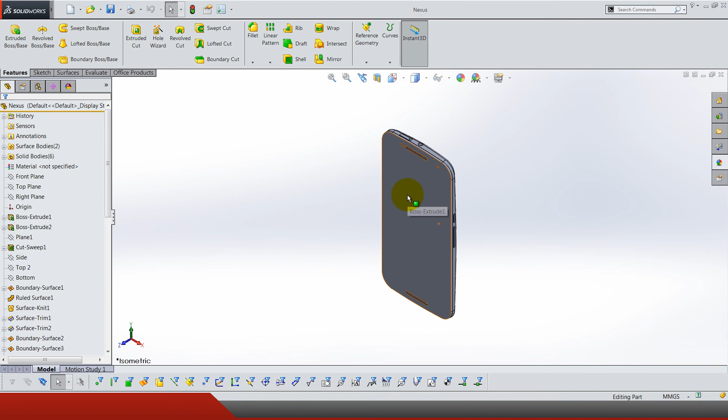These two surfaces we need an offset of 0.1, and make sure it goes inside.

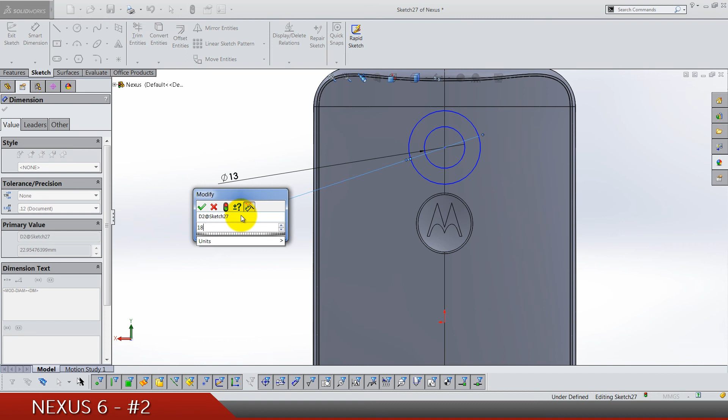Now front plane sketch, just a second, okay, and do 2 circles, 1 and 2. Now it's vertical with the origin. The diameter for the small one is 13. For the bigger circle it's 18.75. Now from the origin it goes 56.

Exit the sketch and let's do extruded cut, but this is gonna be thin feature 0.1. Let's view it from the back. And the direction of the thickening is gonna be inside. And yeah, I think that's it. Just press here through all.

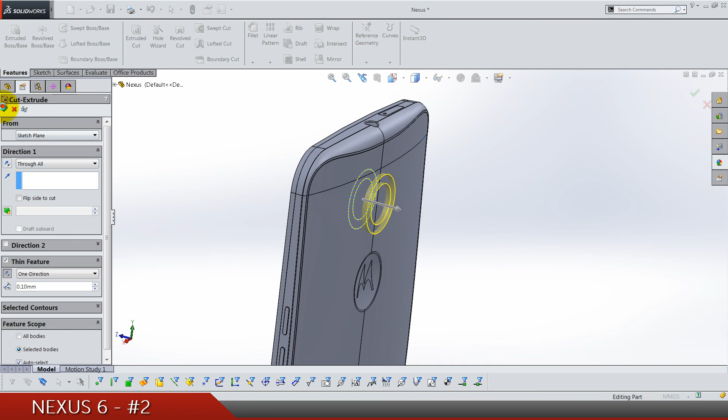Now same sketch, and extruded cut, but in selected contours deselect and select the bigger circle from the top. Let's view. We need an offset by 3.75. This direction is more to the back, not to the front. And again, no, we need here 0.1.

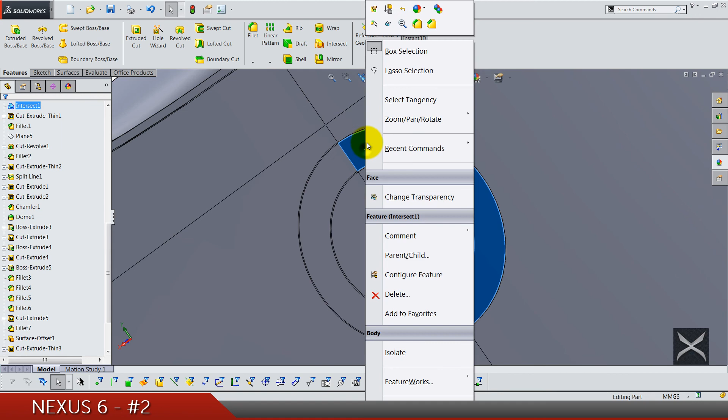Okay, now if you are having these bodies to keep question, that means that you have done everything right. Also, if you can hide this body, it also means that everything is okay, and hide this surface for a moment. This is how it should look.

Now what we need is... no, let's first do back surface offset by 0.75 to the inside. Sorry, and front plane sketch from the back, and do one circle and another one here. Let's find the sketch we used here.

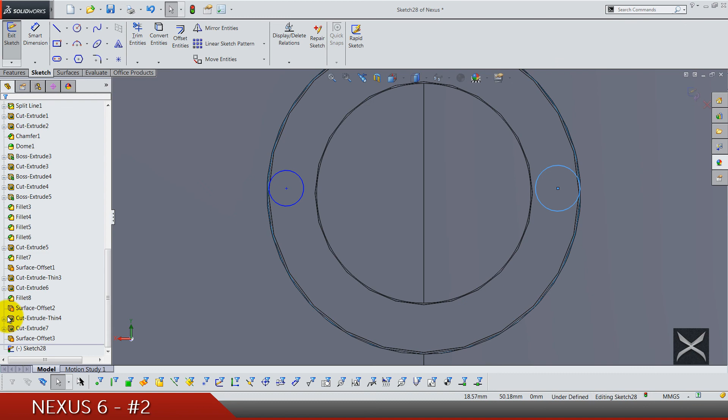It's sketch number 27. Make this point, this one and this one horizontal. Now from the point to the circle we have 7.8, and same here. The diameter is 1.75 also for this one.

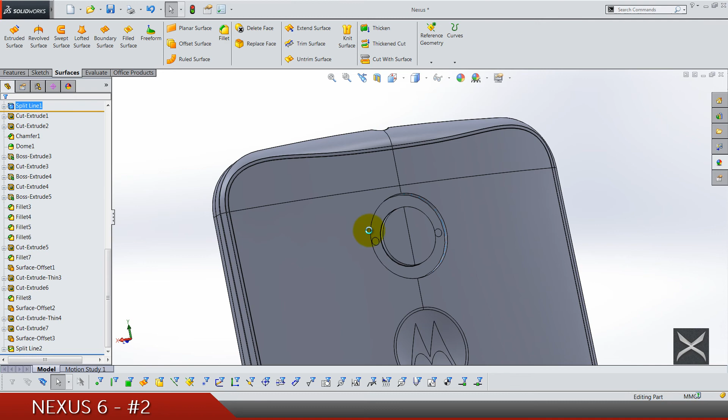Exit and let's do a split line for this face, and it looks weird. I think that this is right. Yeah, I'm gonna hide this sketch now, and we can now do 2 domes. So the input for this face is 1 millimeter, and again for this face 1 millimeter.

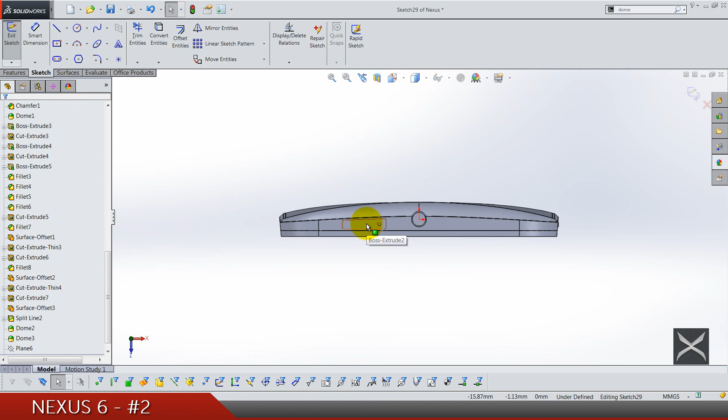Now plane by top plane, 56, direction is top. Sketch and we can hide it. Now let me just check what we need to do here.

Now let's select this dome and do an intersection curve, and another curve we might need or not. Let's try like this.

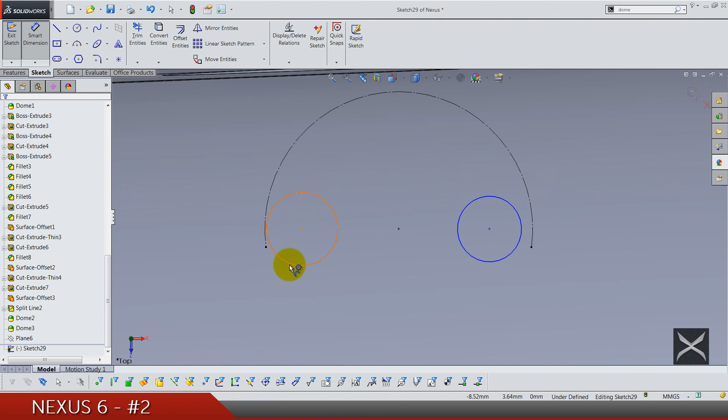For construction, now draw two circles, one here and one here. Make these points horizontal. Dimension between the point and the circle is 0.3. Same here. Diameter is 0.3.

And we also need one center line that goes from the origin up. Make sure it's vertical. And we can do revolve. Now this is just gonna be a revolve, and do not merge results.

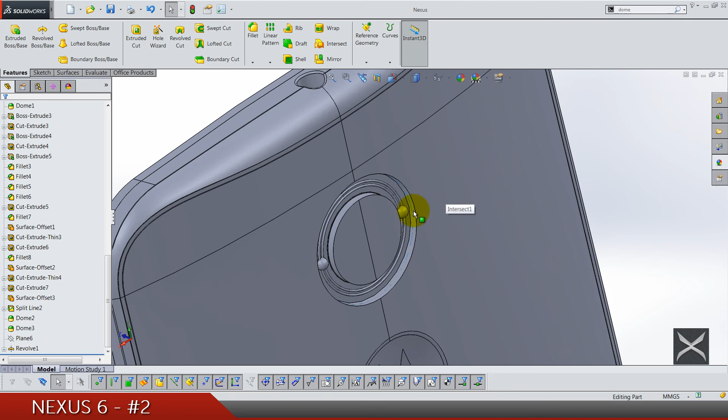Now let's do a front plane sketch. Spin it around to the back view and do a circle that's gonna be diameter 5.25. Find the sketch, this one, and this point is gonna be coincident with this one.

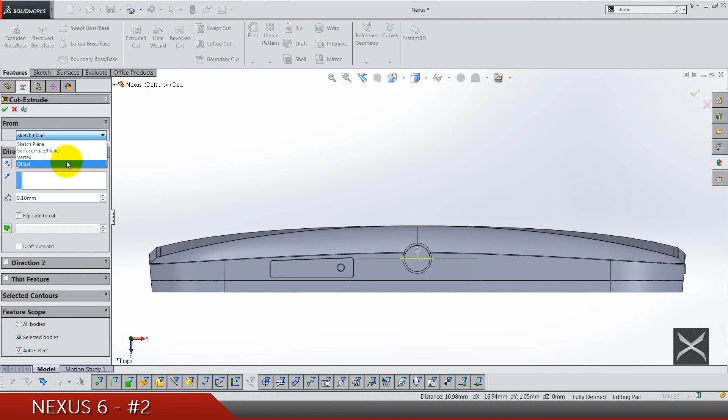From the top view, do extruded cut, offset by 3 to this side and cut through all. Now we need a chamfer for this edge. It's gonna be 0.25. Okay, perfect, and let's hide this sketch.

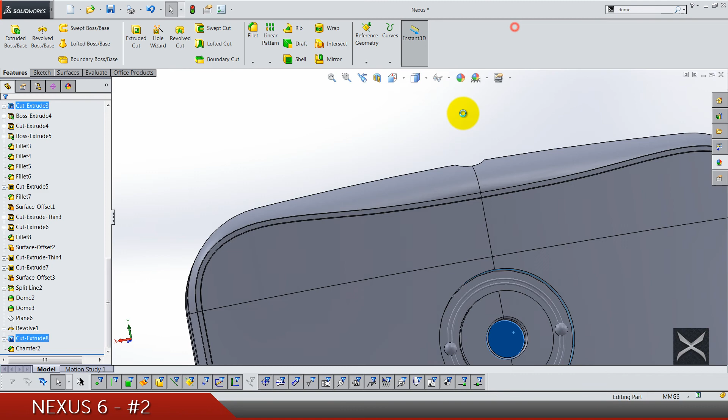Let's see what's next. So on this face we also need a sketch. Let's convert and make it for construction, because we need these points, and this circle is gonna be phi 3.

Now cut again a 1.5, and chamfer 0.1, and again we need a dome for this camera. The input is 2 millimeters. Okay.

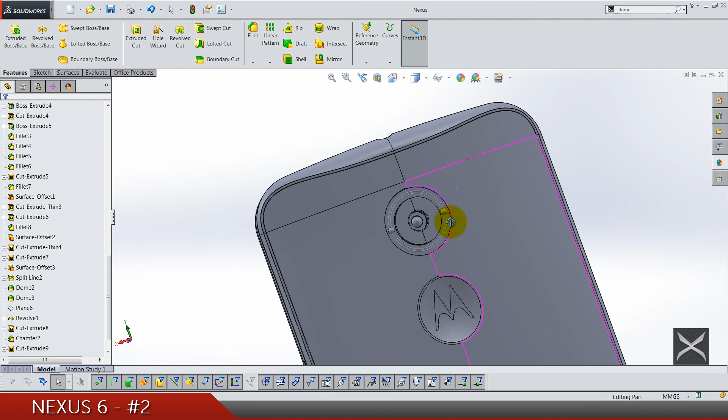Now let's do one front plane sketch. Again it's gonna be, let's find the sketch we already used. Okay, it's this one, show, and let's, well, we don't need a sketch, sorry. Let's exit and use this existing sketch. Now select extruded boss, this is the direction, and select the contour, select only the small circle.

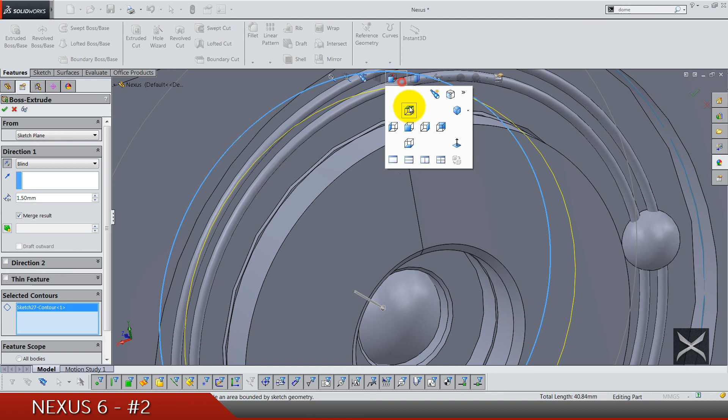Now the distance is going to be, let's see from the top, 3, 4, 4.5. Let's see with a 4.5. With a 4.5 we still have this gap here, and that's not good. Let's make it bigger.

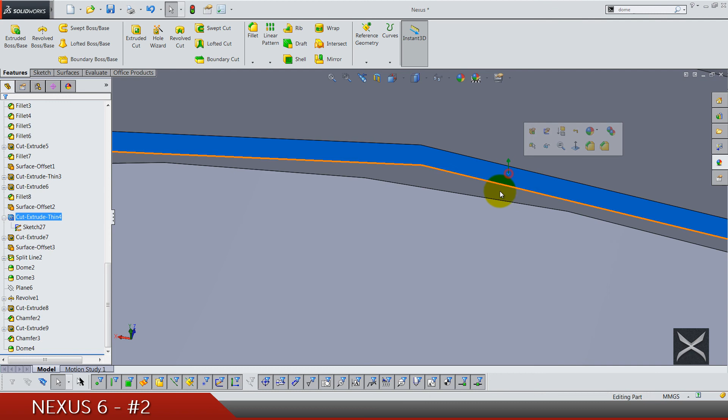So looks like we're gonna delete this, I'm sorry. And we're having something here that is freaking me out. It's not so visible, but it's visible.

Aha, so we should cut it actually. Okay, let's do a front plane sketch. I'm sorry for this, it's not really easy sometimes to get all details. I'm gonna convert this edge and also this one, these two. Now I'm not even sure what we're actually having.

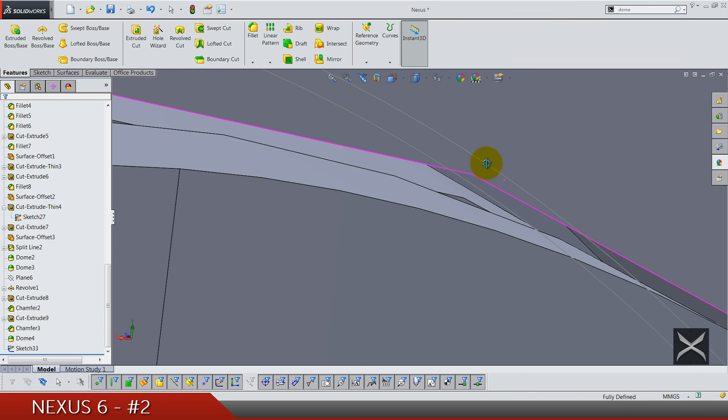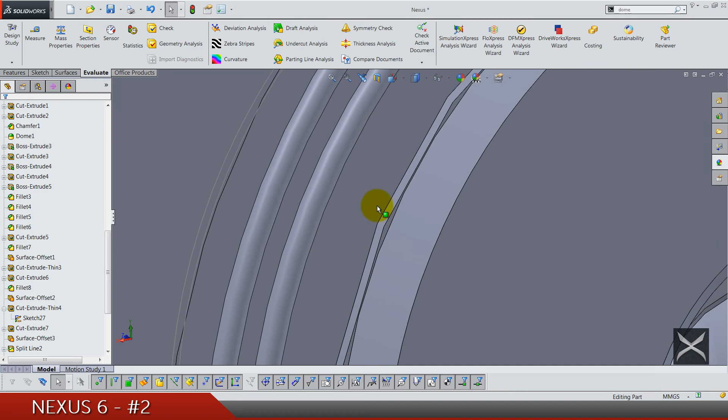So it should be, let's measure from the front plane to here, 3.75, and from here to the front plane we have 3.75. How's that possible? Okay, let's try then this sketch. Extrudes by 3.75 this direction.

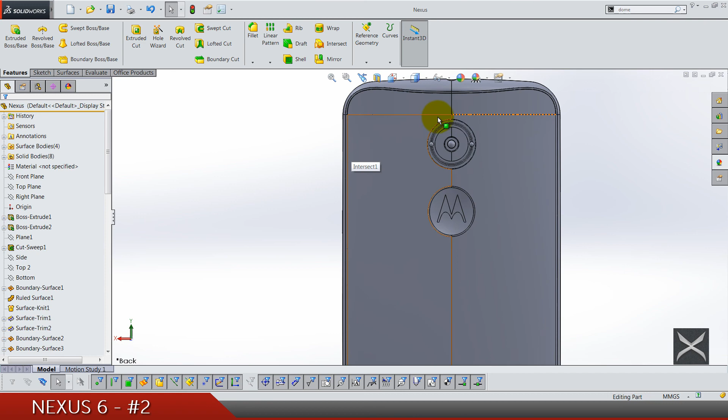Okay, this was so that's fine now. We can hide this sketch and also the front plane. I don't know where I turned it on. And what's next? The sketch on the plane, and the plane is number 6.

So this is what I wanted to connect. Let's make a sketch on this face. Do a convert and another circle that goes till this one. And extrudes.

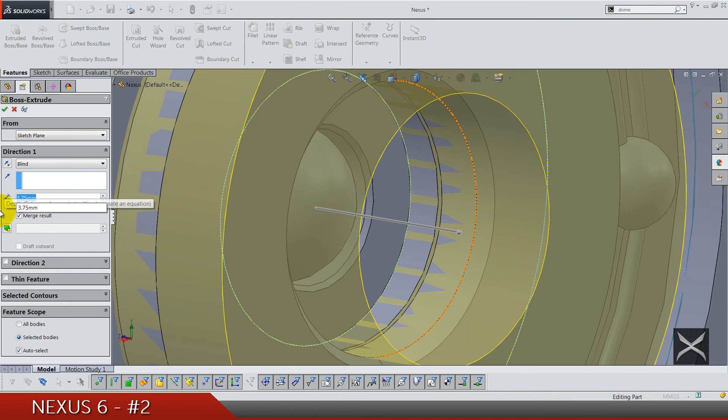Let's just make it 2. Is it too much? Yeah, it is. Let's try 1.5. Yeah, that's better. Now we're not having any gaps, and everything seems fine now.

Sorry for this. Let's get back to plane 6 sketch. Now this face and this one will do an intersection curve.

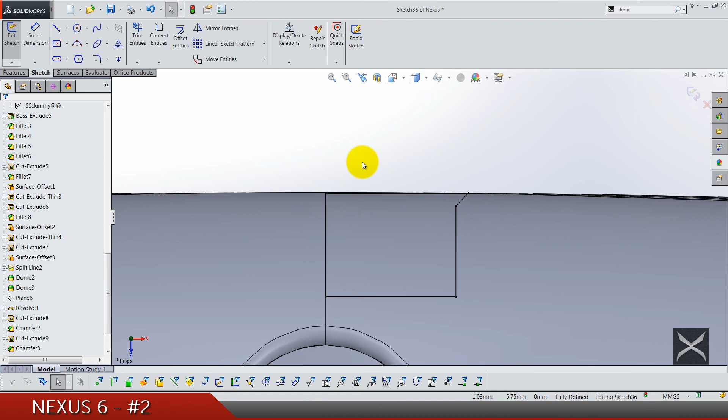Get back to the top, delete left side, and let's just close this loop with a horizontal, vertical, and make this line also horizontal. That's it. And do a revolve. The axis is gonna be this one, of course. Do not merge result because this is just the glass of the camera.

Okay, what's next? Yeah, let's get back from the solid bodies. This body should be shown visible, and do a fillet 0.1

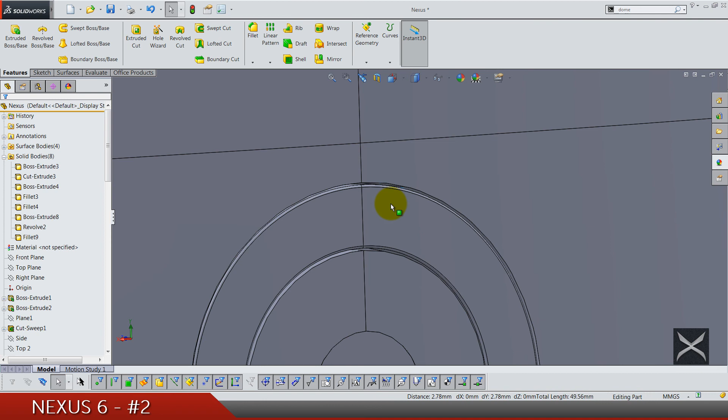on the edge of the glass. So it's this body, these two edges, and fillet again 0.1 for this edge and this one. It should be the same body, and it is.

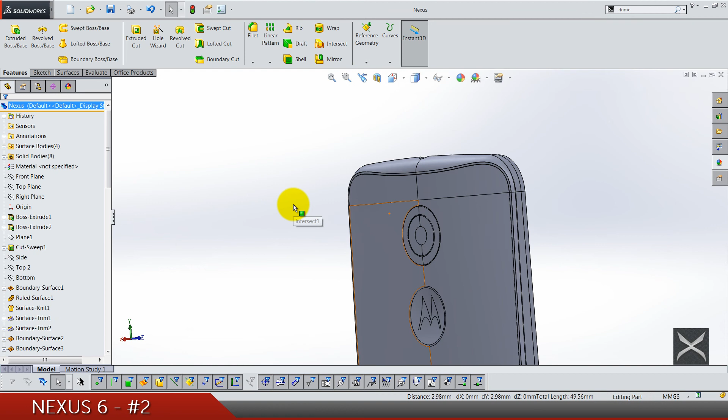Now we have to finish the charging details, the hole for the charge. Top plane sketch, and let's get it to a bottom view.

What I'm gonna draw is something like a rectangle. I don't know why I didn't use rectangle. Never mind. Do a center line from the origin to the midpoint of this line, make it vertical, and now this should be 7. This dimension is 2.25.

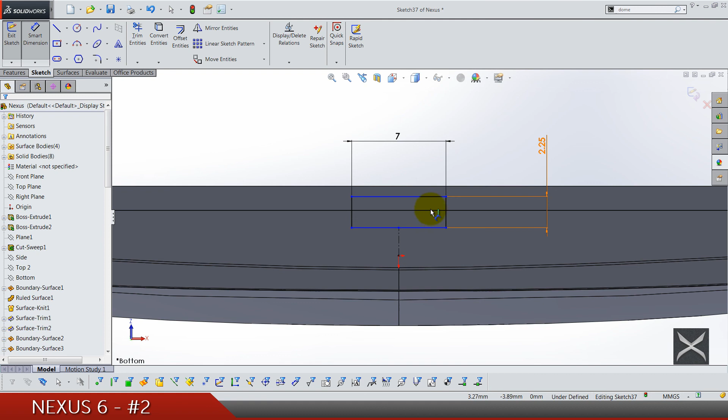Okay, now this point is actually at the origin, so we haven't needed the center line. Let's delete the center line and make this line and the origin midpoint.

And we need a chamfer. It's here. 0.75. The angle is 45. For these points, yes, and this one.

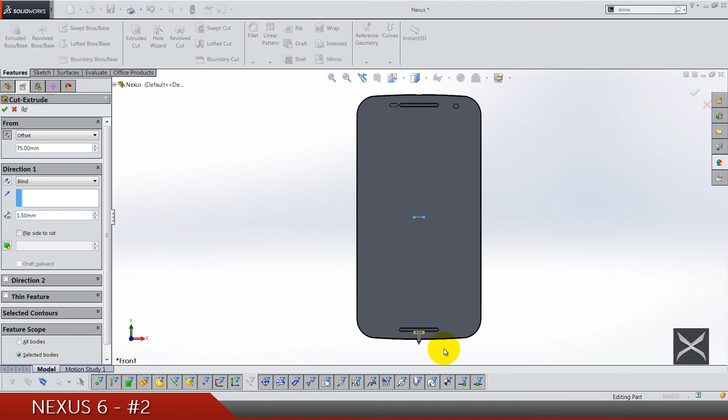Exit the sketch. Now front view. Extruded cut offset by 75, and direction is bottom, and we are cutting through all, of course.

Now let's use the same sketch. Extruded boss, again it's offset by 75, and we're gonna do the thin feature, so the thickness is gonna be 0.175. Make sure that it goes down, and it's gonna be 4.75 in this direction. Make sure also that we are not merging this, so it's gonna be a separated body again.

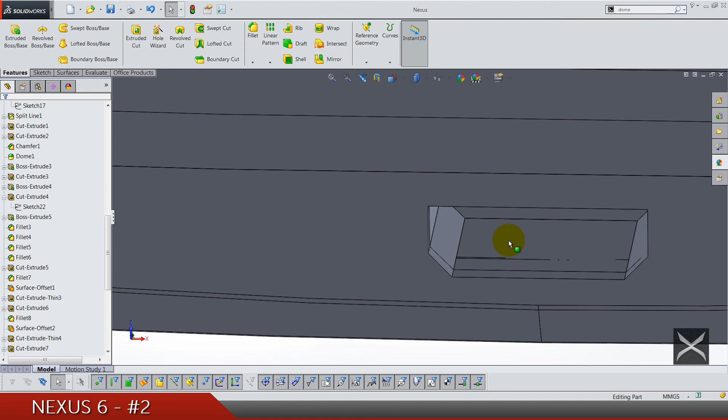Now we just need to edit this thin feature, because we wanted it to go inside this in a thickness. Okay.

I'm gonna hide this body just for a second, and let's make a fillet. Fillet is 0.15 only for these edges. Just select all of the edges like this.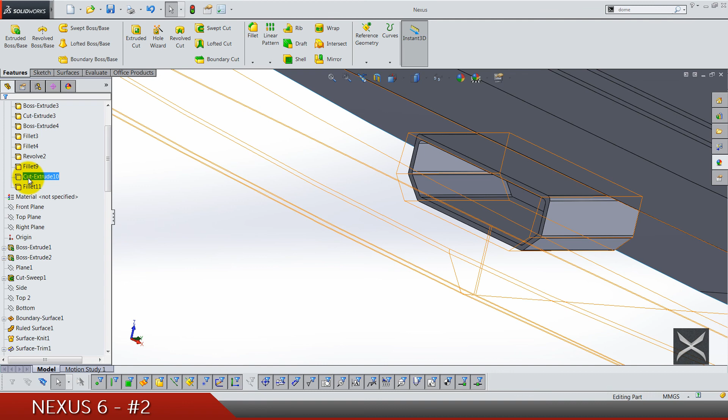And let's get this body visible. We also need a fillet 0.15 for its edges, for the edges of this hole. Looking like this.

And also fillet outside 0.05 for this edge. Or we can do 0.1. Let's do 0.1.

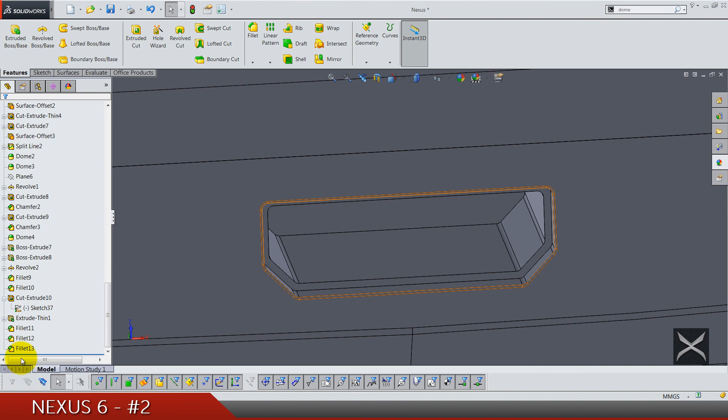0.1. Now let's use this face as a sketch face.

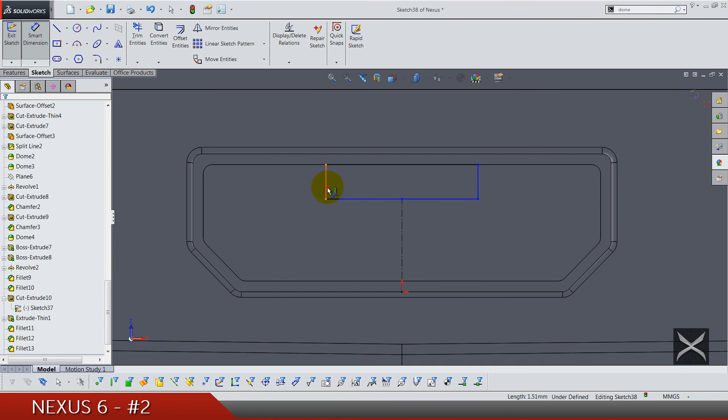And we need just one rectangle. I'm gonna use this one. The center line that goes from the origin to the midpoint is vertical. Height is 0.5 and this is 3. Exit the sketch.

And do extrude in this direction till, let's say, this point. And we can unmerge results.

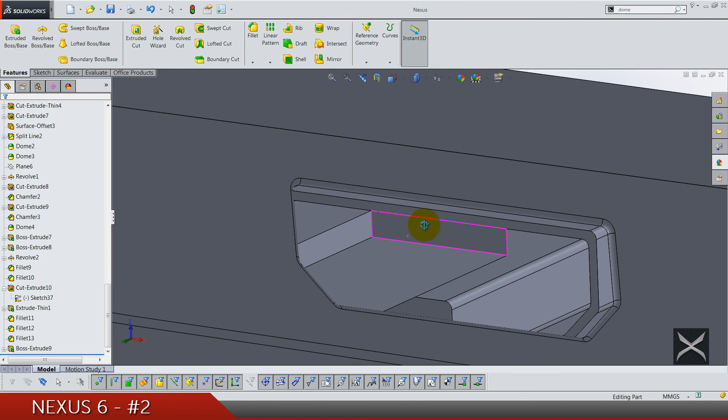So in rendering you can have this body separated, and also what we can do here is, let's just edit this boss and offset it by 0.5 to the inside.

Now on this face do a sketch. We need 3 rectangles, 1, 2 and 3. Center line from the origin to the midpoint of this one, of course vertical, and it's gonna be 0.25 by 0.25, and same here.

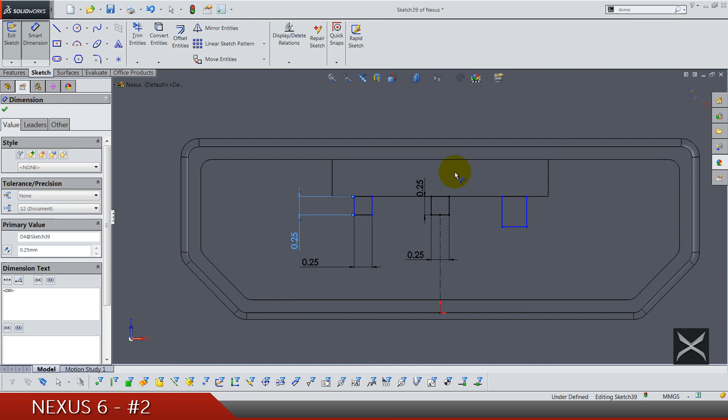Also 0.75 between the edges. That's it. No, cancel. Almost deleted.

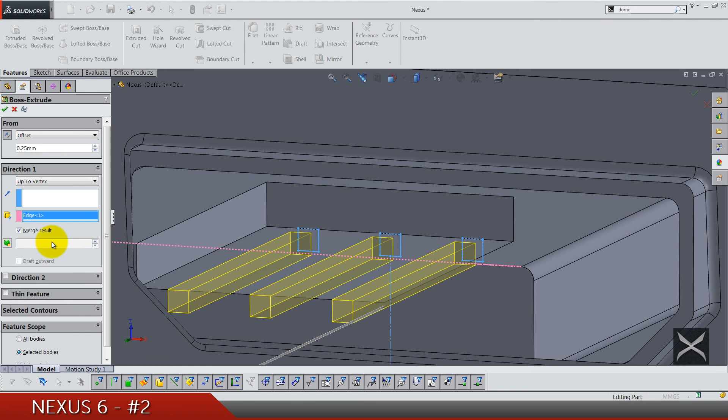Offset 0.25 to the inside, and I'm gonna go till this edge, do not merge results, and I think that with this one the charger is done.

Now let's do a top plane sketch. And yeah, let's select these 2 edges and convert. Do a spline, 2-point spline like this.

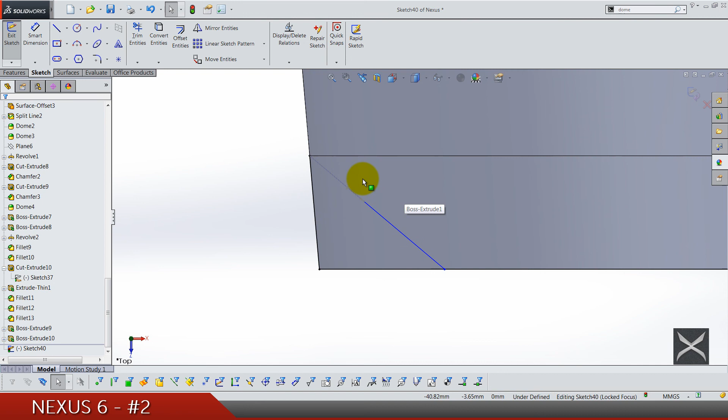And let me just see. Okay, this point of the spline is going to be here in this point, so coincident with this edge. And here we have 1.575.

Sorry, just one error I did here. Let's delete the spline and place it again like this, because it goes from the point to the line 1.1, and here it goes 1.575.

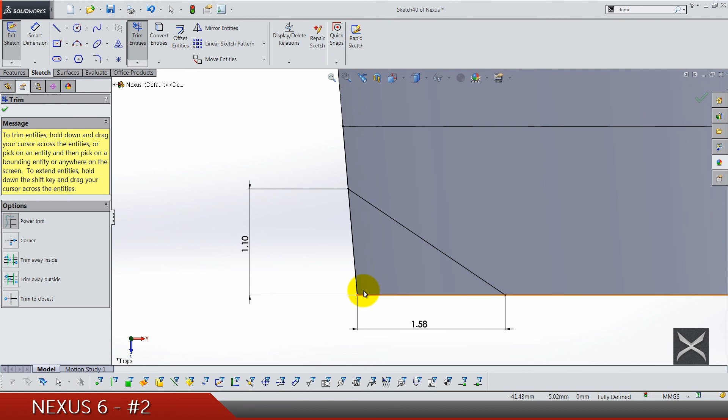Now it's gonna be tangent here. Oh, it's not gonna be tangent. Undo, and let's first trim these 2 edges, and now let's make it tangent.

And also here, distance for this one is gonna be 2, and for this one 3.5. And let's just close this loop.

I'm gonna drag these points like this. Well, we can delete this line, and this point is gonna be coincident with the edge.

Let's get back dimension to these points and just close this loop. But not in this point, sorry. I keep making some errors, I don't know why.

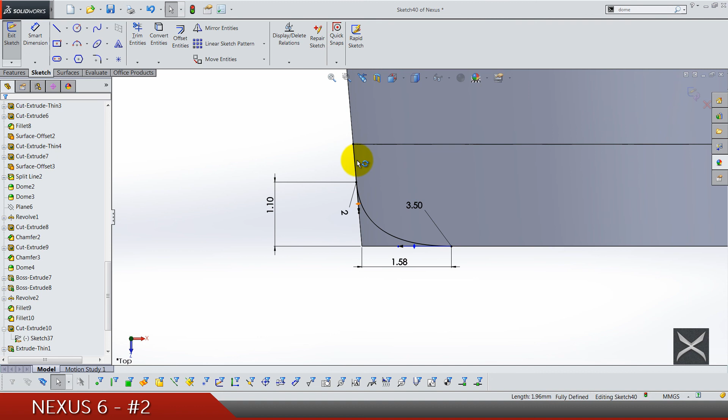Let's make this for construction. Not really my day, looks like. So 1, 2, 3, 4.

Now this can be, for example, 2, and same here. Exit the sketch, and now select this sketch. Where the hell is it?

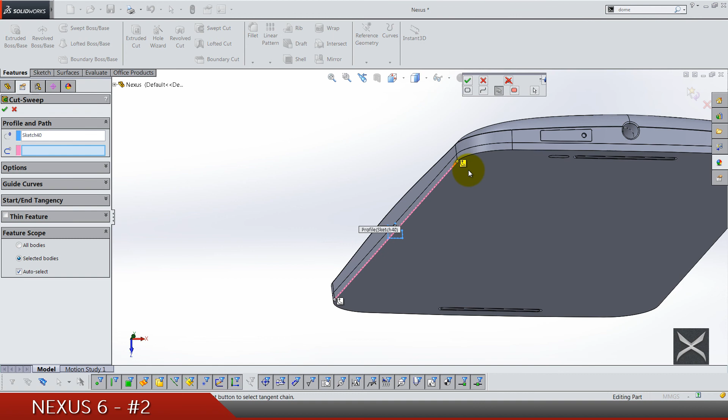Select the sketch and do a cut, swept cut. The paths selection manager, select this edge and select this tangent option. It's gonna select all edges and click OK, because this is what we need.

Okay, let's see what's left. Now right plane sketch, and let's do two rectangles. One, no, let's do only one and one center line on the origin.

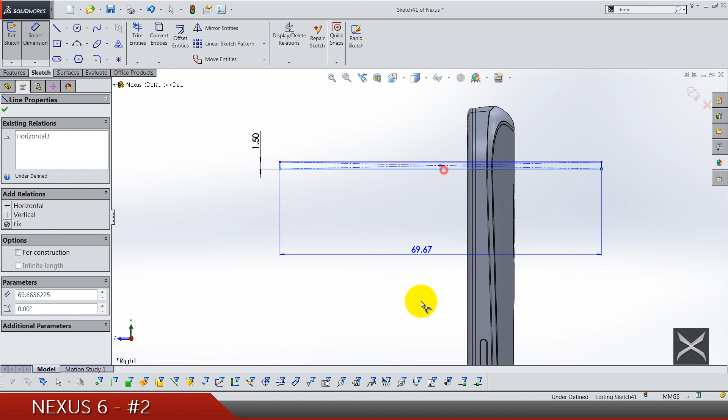So this rectangle is gonna have the 1.5 height, and it goes from the origin 68.5. We can do these points and the origin vertical and make sure that it's wider than 50, and also do a mirror for the rectangle over this center line.

And now we can add the split line. The faces that are going in a split line is this one, this one, this one, this one, and yeah, this one.

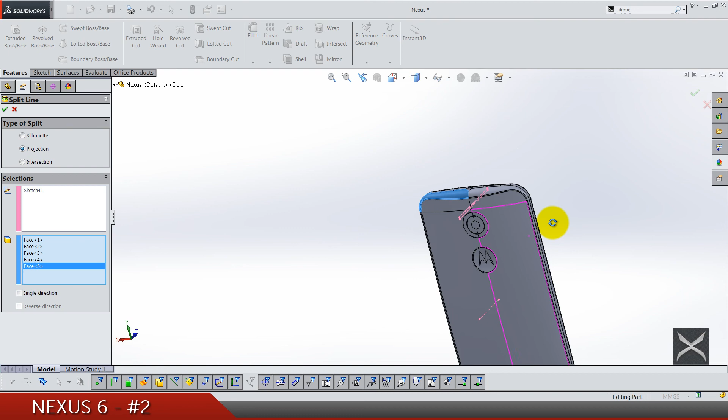We should do fillet here first, but it's not important. Or we can do a fillet. Let me just a second. Yeah, let's do a fillet first, I'm sorry. Fillet

0.05 for this edge. Wow, that's too much. Maybe. Let's try for this one also and see how it looks like.

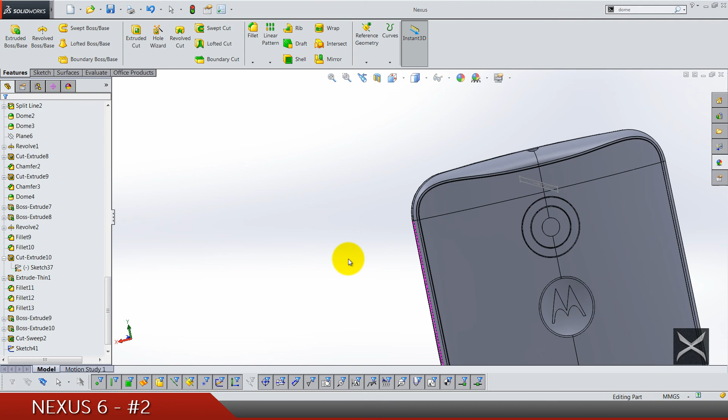Well, looking from here, it doesn't look so big. Yeah, it can be done like this.

So sketch a split line, and here just select these faces. Okay, this is done from that side. Now this one.

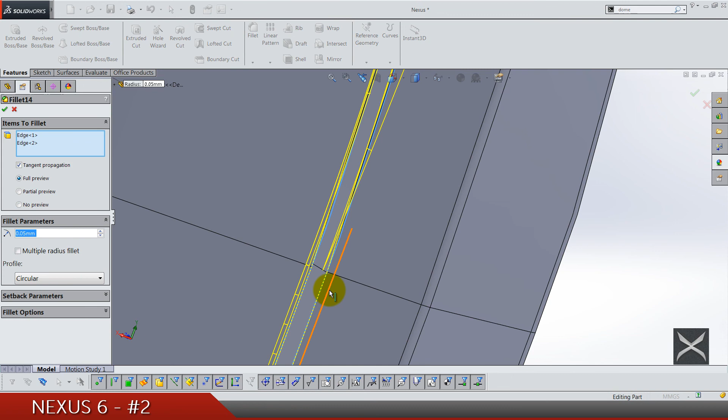Oh, looks like we have an error. The fillet is not done well. Let's select this edge also. Now, is it done well or not?

Shit happens, for sure.

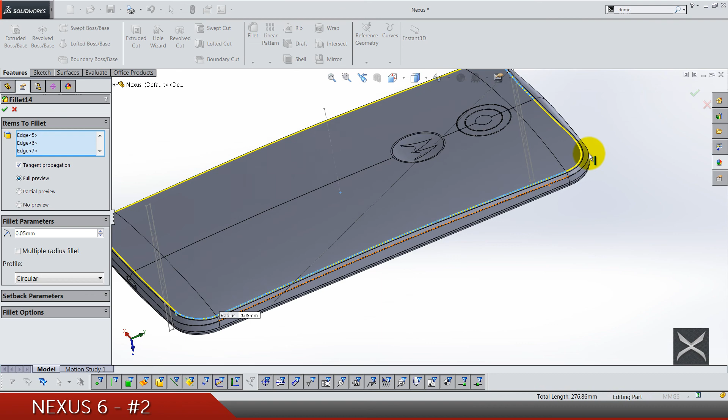I guess you can also see which one is done well and which one is not. It's definitely a problem with the tangency of the faces, I'm sure.

And here let's select also now another face, the edge. That's it.

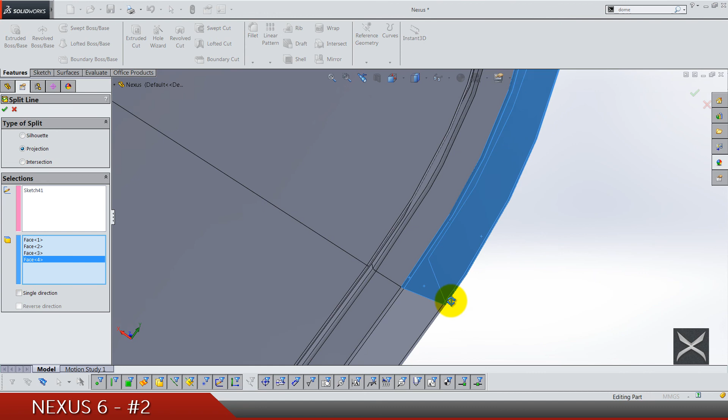Okay, split line number 3. So 1, 2, 3, 4, 5, 6, 7 faces here and also here. And don't forget the bottom faces.

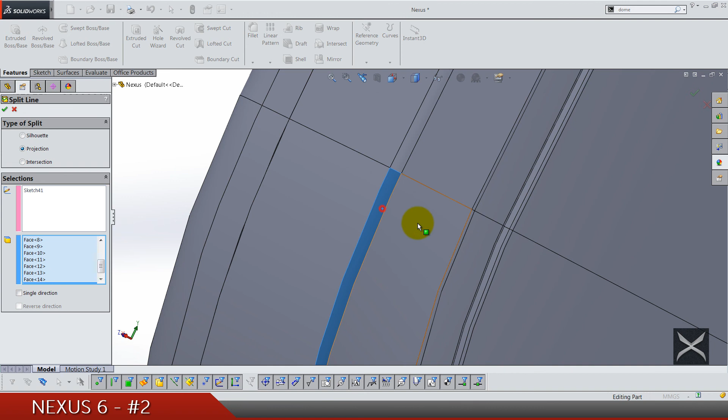Something is wrong here, definitely, as I'm able to see.

Which fillet is this? It's this one. Let's edit this fillet and... No, it's not a split line.

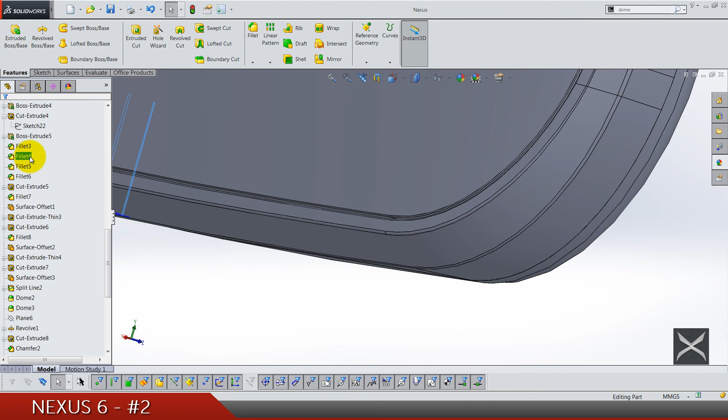Who cares? If you find some error, you can probably fix it by yourself.

Now what's left from the top? Don't you worry guys, we got a lot of things to do. We are not done yet.

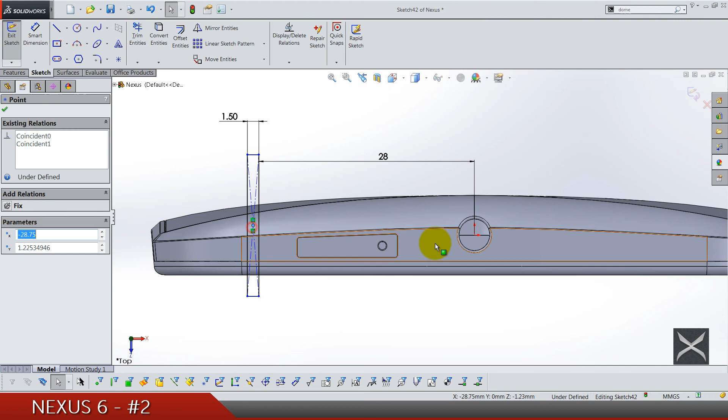So rectangle here, and it's 1.5. And here we have 28. Make sure that this is horizontal, and 20 here.

Also center line, and mirror. Again split line. Now I'm not sure which face I should select.

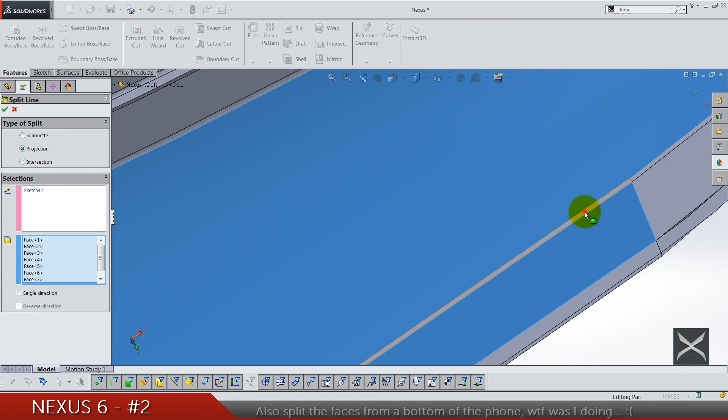Okay, what's next? Fillet 0.1 here, and also here, and fillet 0.2 this face and this one.

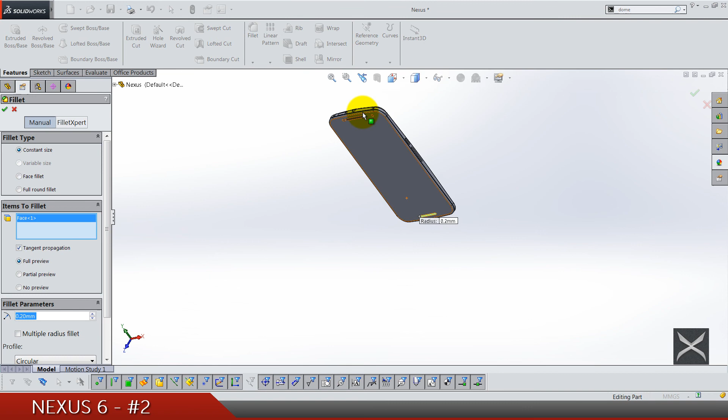Now we really have a lot of work yet to do. Front plane sketch, and let's see, where is our button?

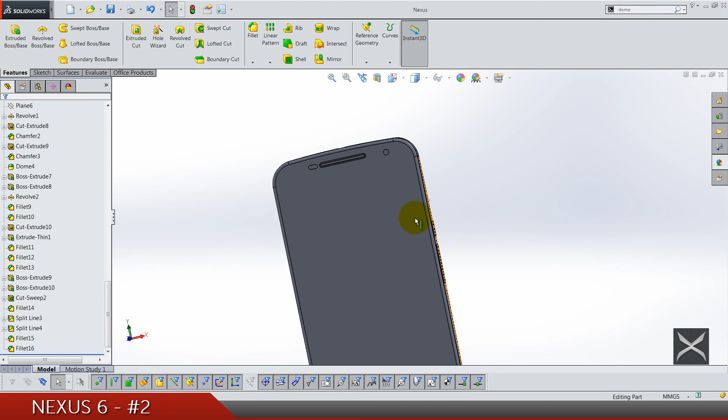Is it too much or not? Let's try with 2.3. Yeah, that's perfect.

Front plane sketch, and zoom in here on this top button. We need a triangle. 1, 2, 3. Oh, this shouldn't be the midpoint. I hate when it happens.

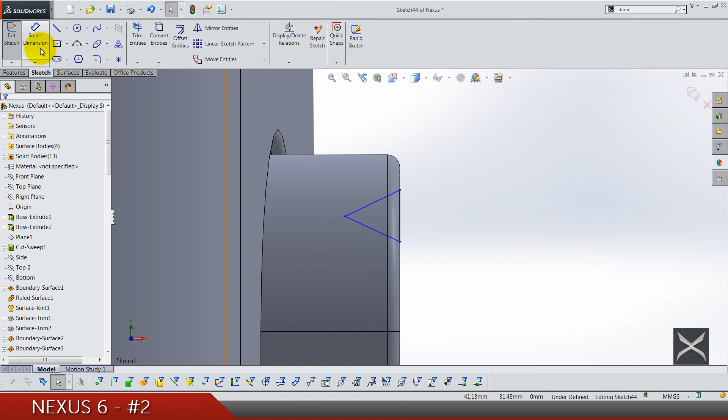Now 0.4. Let's drag this down, and from edge till here we have...

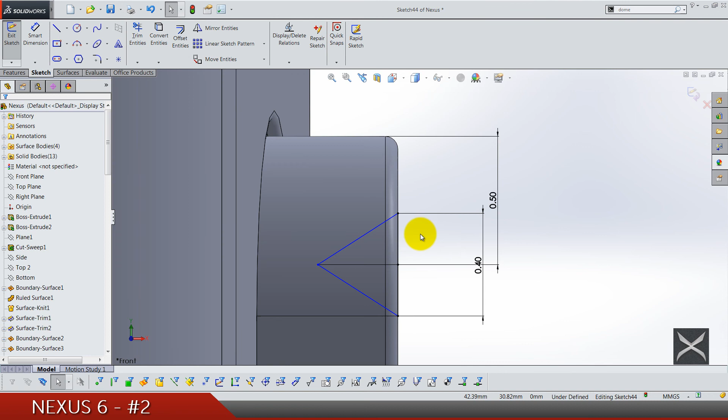Center line that goes from the point to the midpoints. And center line is 0.3.

Fillet 0.025 here. Okay. Extruded cut through all both.

And now let's select this cut and do a linear pattern. The edge can be this one. The distance is 0.5 and the number is 17.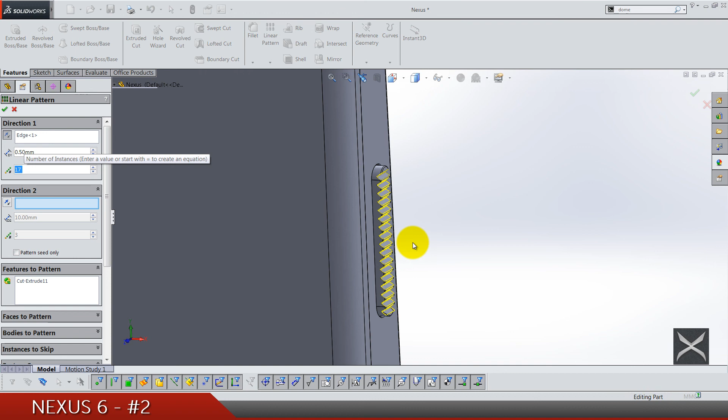Okay, now here on this face do a sketch, find the sketch number 1, and make it visible, and let's convert this rectangle.

We can cut it by 0.7, and same sketch, extrude by 0.7, but do not merge results, it's an inside direction.

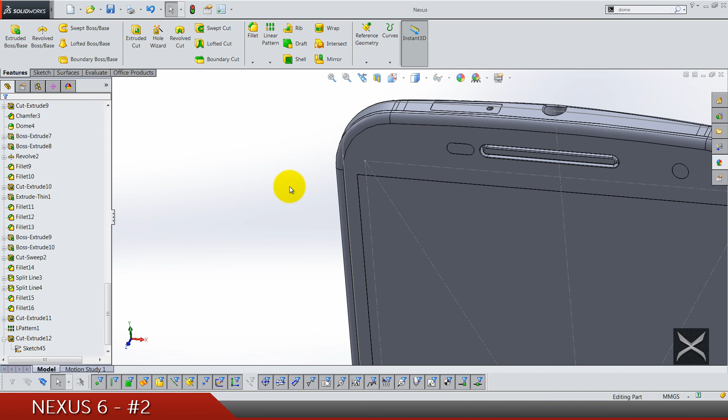Now we can offset the back surface. Let's hide sketch number 1. Offset these two faces 0.25 to the inside.

And for the end, what we need to do is a Nexus logo. You don't have to do this if you don't want, if you don't need it. If you can do it in a rendering and put it, you can do it, but I'm gonna show you how I'm gonna do it.

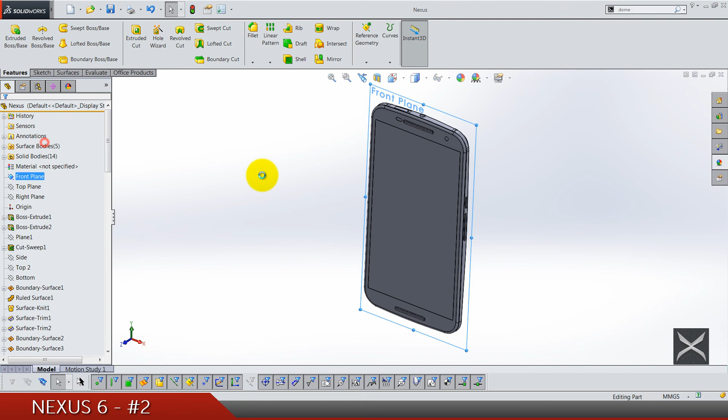Nothing special. So front plane sketch, I'm gonna rotate, and of course tools, sketch tools, sketch picture. I'm gonna leave this image link on my Facebook page so that you can download.

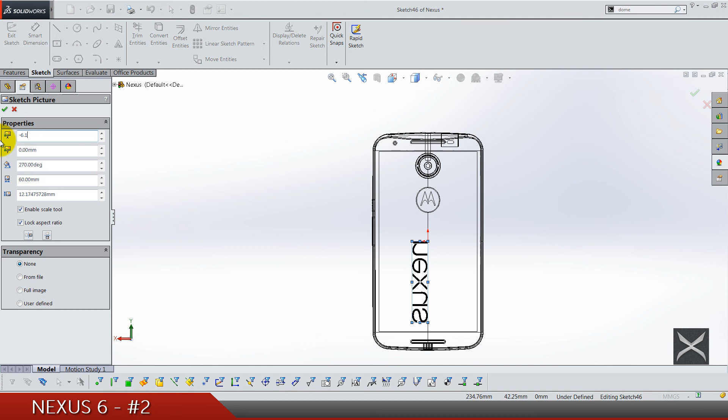Now the parameters are angle 270, this is gonna be 60, X position is minus 175, sorry. The Y position is minus 52.

That's too much. Yeah, that's definitely too much. Let's try 0. Or minus 5.2. Okay.

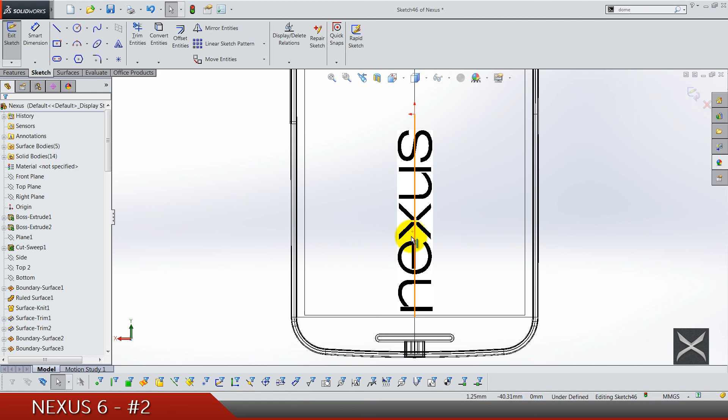And let's, yeah, this is how it should look like. So use this to make the logo look okay. That's it. Now I'm gonna do this like a freehand sketch, and I'm gonna speed up the video till I finish it. So let's go.

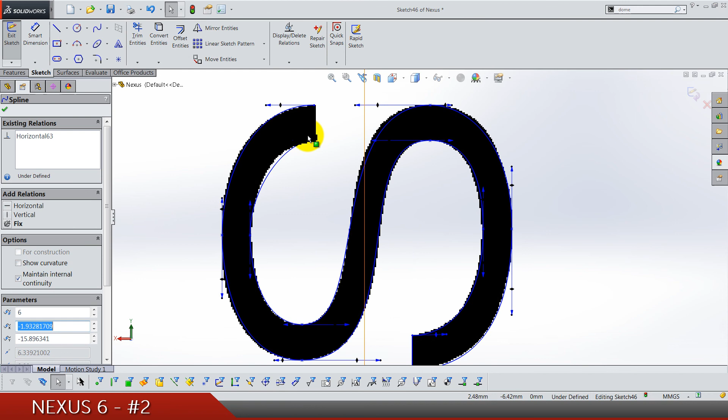So here we have the sketch finally done. And we can do a cut. I'm gonna select up to surface, and let's find, oh, we have to hide some bodies.

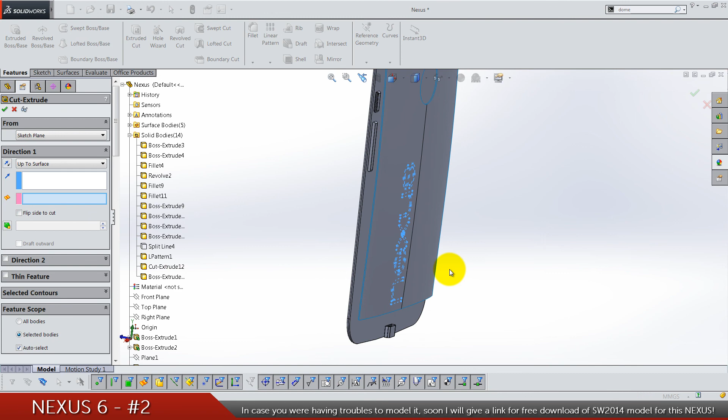It's gonna be this body. Hide it, and which one is the surface? I guess it's this one. And show this body again. Let's see how it looks like.

Oh, sorry guys, it was just one error, because we have to offset this in this side and then up to surface that side. I hope you understand. Yeah, that's it.

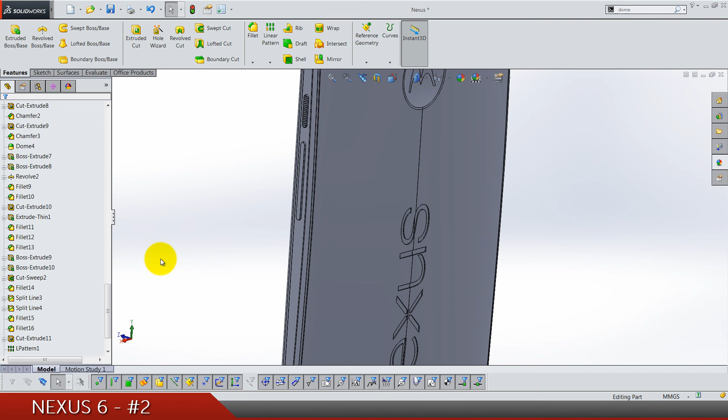And when it is finally done, yeah, you can also add some fillets here if you want. When it is also finally done, we can just delete these surface bodies, and we are finally done.

Let's see how it looks like, and in a rendering tutorial that is going to come, I'm just gonna paint this to help you render it also. And that's pretty much everything.